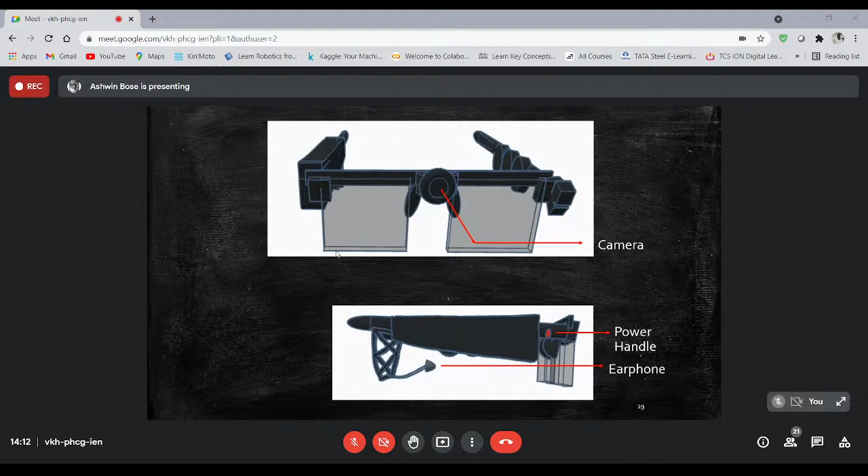So this is our next feature, that is obstacle sensing. We are using an ultrasonic sensor for this purpose. An ultrasonic sensor generates ultrasound and then receives it back after reflecting from an obstacle.

So we can label it as X. As the person proceeds, when the user faces some obstacle, the distance between the obstacle and the source changes. If that value goes out of the range of X minus 5 to X plus 5 centimeters, that means the person is passing through an uneven area, and that alerts the user.

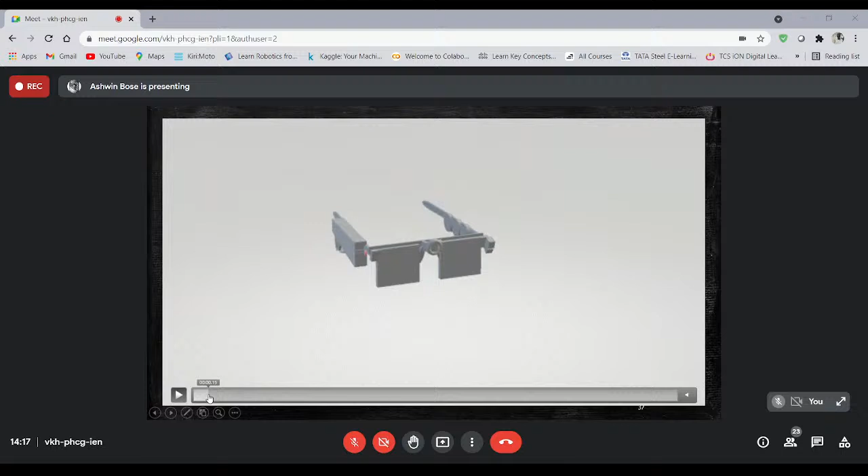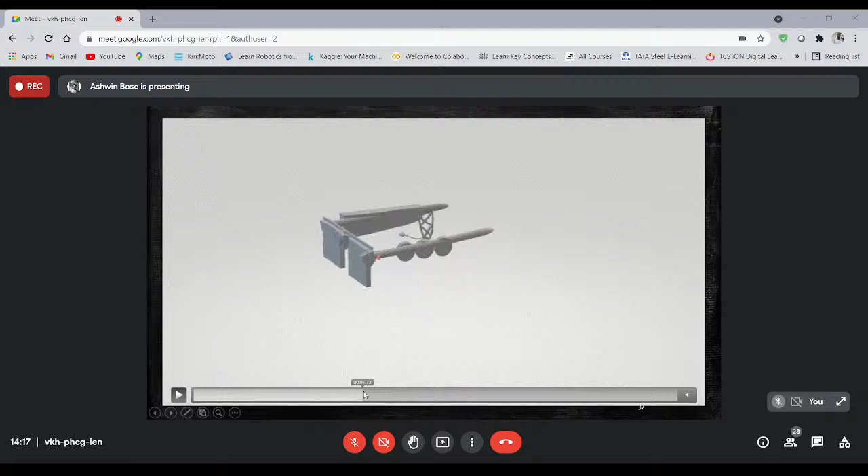So here you all could see the CAD of our model. You could see the cam placed in a toroid position which protects it, as I mentioned earlier. In the left leg you could see there are two pointing sensors. One is to sense the vertical obstacle, and the other is placed diagonally, at 45 degrees with the horizontal plane.

It helps the person pass through uneven areas, and you could also see a red button, that's the emergency photo button. Next to that, you could see three cells, that's a replaceable lithium-ion battery, so that we could replace it once the charge gets exhausted.

Shifting to the other side, we could see a casing where our main single chip Python-based computer is placed, and we could also see a gear via which an earphone module is placed. Finally we could see a red color button on this side, and that is the power button. So this is our CAD representation.

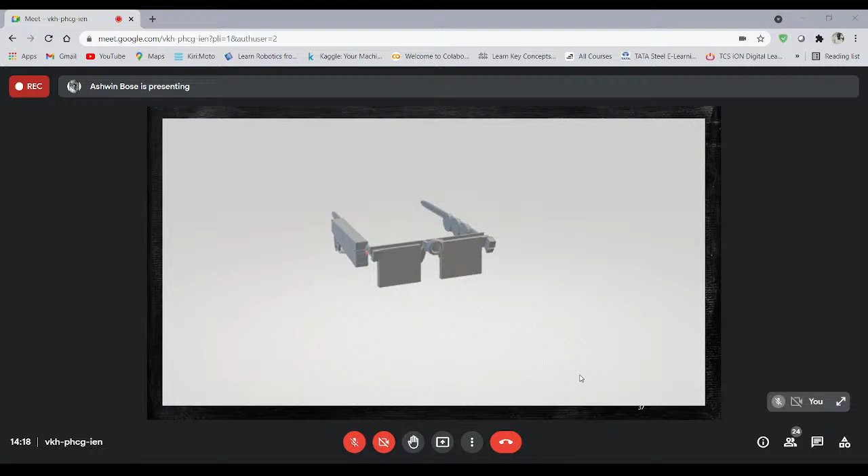So what makes us special? That's the main highlight: standalone device. We don't require any internet, and we only require the specs as a simple unit. We don't have any requirement of a mobile phone or internet. That means we can use our specs anywhere on this planet.

The battery charge will be measured every hour, and it will be informed to the user about the charge left every hour. Once the charge falls below 25%, the person will be alerted every 15 minutes about his battery life. Wi-Fi and Bluetooth are highly charge consuming, so we are avoiding them purposefully to increase battery life.

So why are we using this conventional shape? The dimensions are 15 centimeters by 15 centimeters by 5 centimeters. The weight is equally balanced in our specs. The battery case is exposed but covered, so we can replace the battery with a charged spare if it couldn't be charged on time. And we keep the front lenses unoccupied so as to prevent complete strain on the facial muscles.

So we have presented the problem, algorithm, program, CAD, and the concept of our project. Thank you.

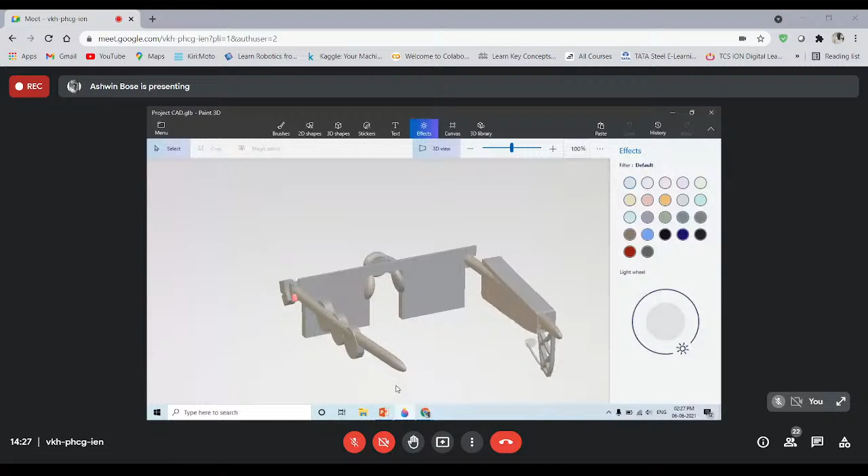Please advise the participants not to stop the presentation, because we may have to ask some queries based on it. So looking at this diagram, how will it be worn by the user? It has the same two legs like any other conventional specs, so it could be worn this way.

So we have placed a gear with earphone on the right side, and on the other side we have placed battery spaces which create a grip on the ears. We have also used this shape because it doesn't put pressure only on the front side - the pressure is equally distributed on all three sides.

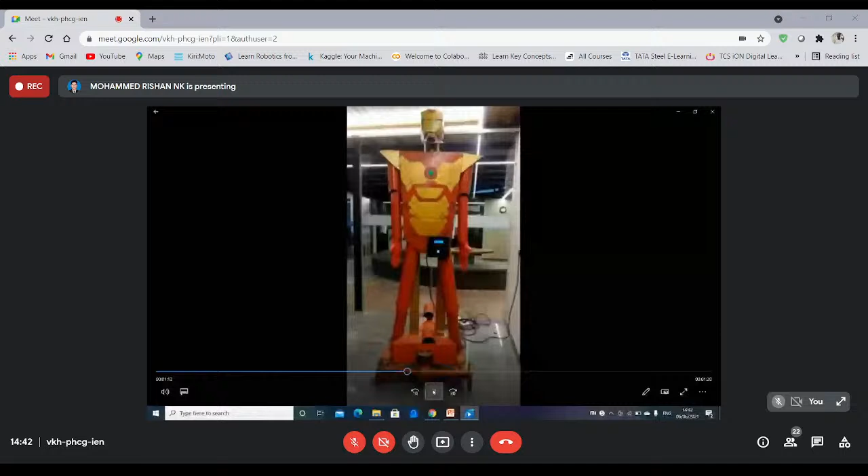Is it visible, sir? Yeah, it is visible. So this is backward and frontward movement. Now it is moving backward. This is a differential gear system.

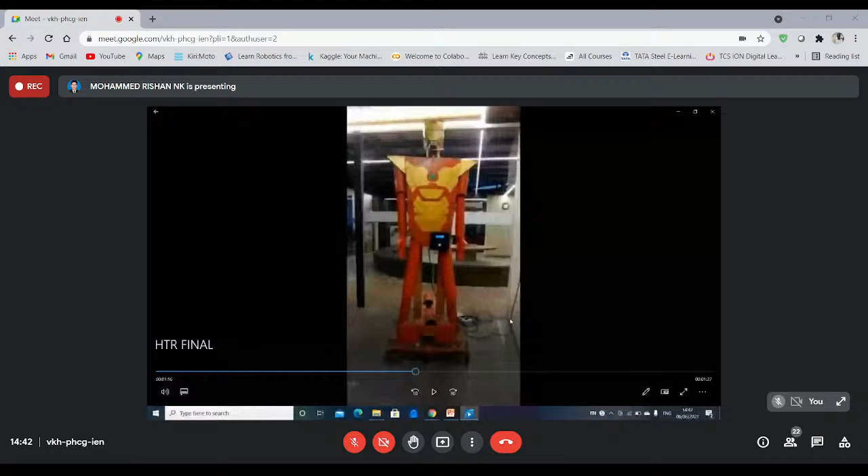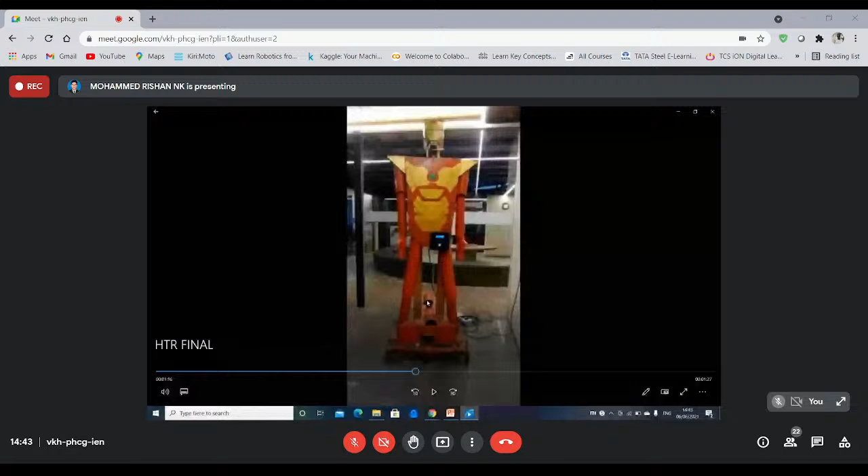I will show you the movement of its hand while drawing a picture. The hand can't draw, there's a CNC plotter, sir. So the CNC plotter is drawing, the hand cannot move. I will show you. CNC plotter is drawing. Okay, then we need only a CNC plotter for that purpose.

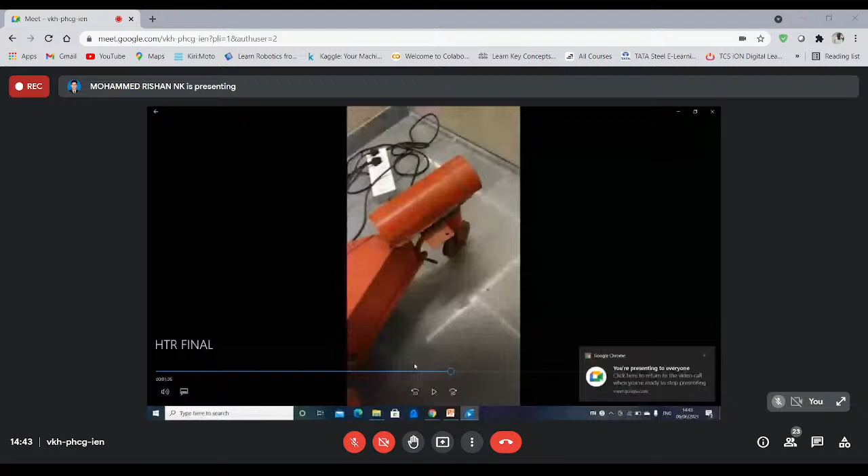So all these, what is the necessity of a robot-like structure? A robot, so that the students can interface and it will help them to give more interactions. And all these we can bind to a single product. Okay, you have some idea and you are taking some effort for that.

Yes, sir. But you cannot answer some of my questions. Why? You cannot give proper explanation because already the devices are very convenient, but this is a huge structure. That's why I have some queries. Okay, that's all from my side. Okay, okay. Thank you, sir. Thank you.

Okay, Mohammed Rishan. Yes, sir. Same question from my side also. What is the need of this big structure?

This is only a prototype, sir, developed for good appearance and good attraction. I have told you that we want to create the complete body into 3D printing technology. So the only additional facility which we provided is that plotting operation, and that can be done by a CNC plotter itself. Sure, then there is no need of going for a big structure and unnecessarily adding the cost and avoiding the degrees of freedom.

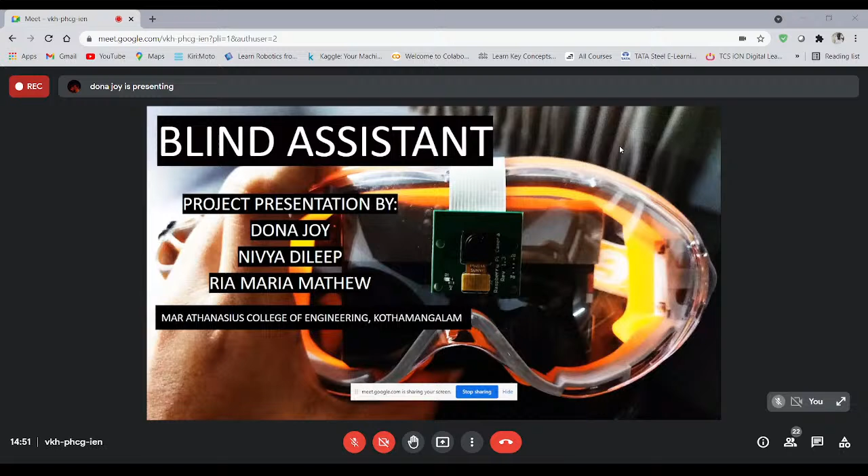I would also like to mention that this project is solely for blind students. We all know that blind students are shut out from the external world because of the constraint that they cannot see. So they are not able to contribute to society or get basic privileges like education.

Now I'll show you this is the braille system—everybody knows about the braille system. And these are pictures of the model that I've made. As you can see, this is the Pi camera, and we have the Raspberry Pi with the SD card inserted, and then we have the goggles.

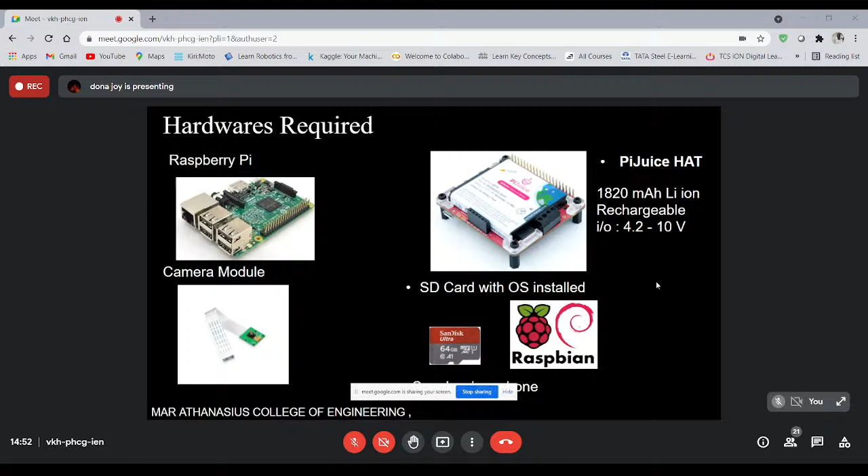Coming to the hardware required, we used a Raspberry Pi 3B Plus, and right now we used an external power supply connected to a power adapter and our normal power supply. But if we have the money to purchase a Pi Juice hat—a rechargeable battery for the Raspberry Pi that is compatible and rechargeable—then we don't have to use a power supply. We also have the camera module and an SD card with Raspbian installed. This is the Raspberry Pi, everybody knows about it, so I don't have to explain.

Coming to the software required, we used Raspbian for Raspberry Pi, Tesseract for character recognition and image processing, and OpenCV, a Python-compatible library used in Raspbian for many vision tasks. And then we have TTS, text to speech.

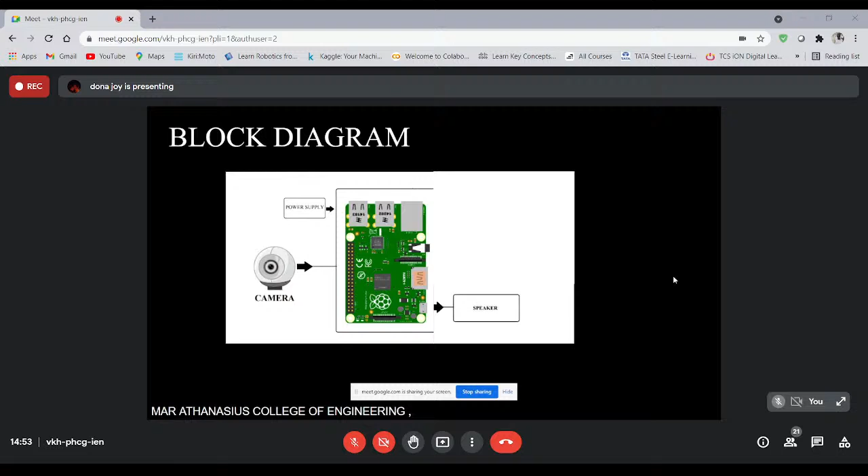The Raspberry Pi has inbuilt Wi-Fi and Bluetooth, so we just have to use a Bluetooth earphone.

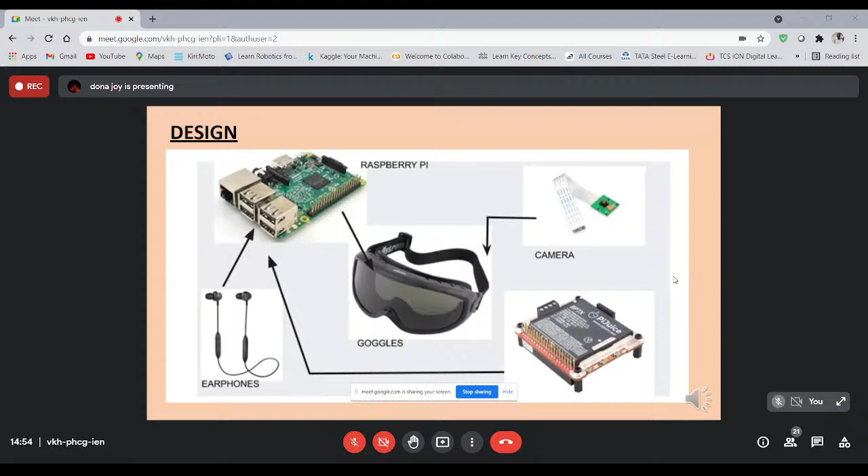This was our prototype; now we have an established product. In the prototype, we have the goggles where the Raspberry Pi is kept inside, along with the camera, earphones, and the PiJuice. Now this is the making of our project—we first booted the Raspberry Pi, and you can go through the slides.

Now coming to the first function of this project, text detection. As you can see, this is a pre-uploaded text image, and this is the detected text image. I'll show you the video that I have taken from the model.

This is the goggles with the Raspberry Pi in it and the camera here. And this is the speaker, and we have a display here. When I run this, three things are going to happen. One, the picture will be displayed. Second, the text of the image will be detected here. And third, the text will be read out using the speaker. So I'm going to run this.

Hello, audio is not there. Dona, can you increase the volume? Okay, audio is not there. Okay, I can explain. Hello, am I audible? Yes.

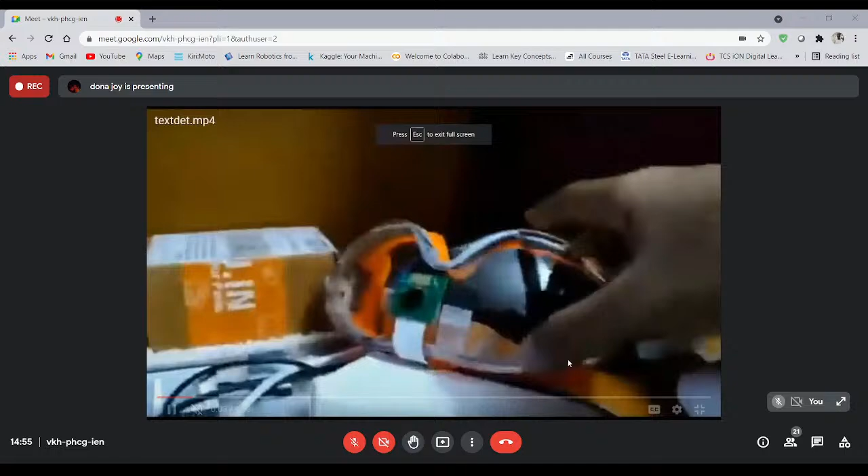So this was the initial setup of the text detection. As you can see, we have the Raspberry Pi model here, and then we have the connection, the speaker, and this is the program. First, I am showing a picture, and that picture will be text detected and converted to speech. So right now, this is me showing the text image, and this text image will be detected here, and it is read out from the speakers. As Meet is not allowing sound to come, you cannot hear it, but the speaker is actually reading out the text. Sorry for that.

Then we have the same thing. There's no use without the audio, that's it.

Okay, and now we have the face detection. This is a pre-loaded image, and as you can see, a bounding box will come. Sorry, yeah, the audio was supposed to be there. This was contouring and everything we use in face detection.

See, a bounding box is appearing on her face, and her name is being identified. We plan to use this in our model, and the blind person can identify people who they know, and they can get the data and name and everything, which will help them interact and communicate.

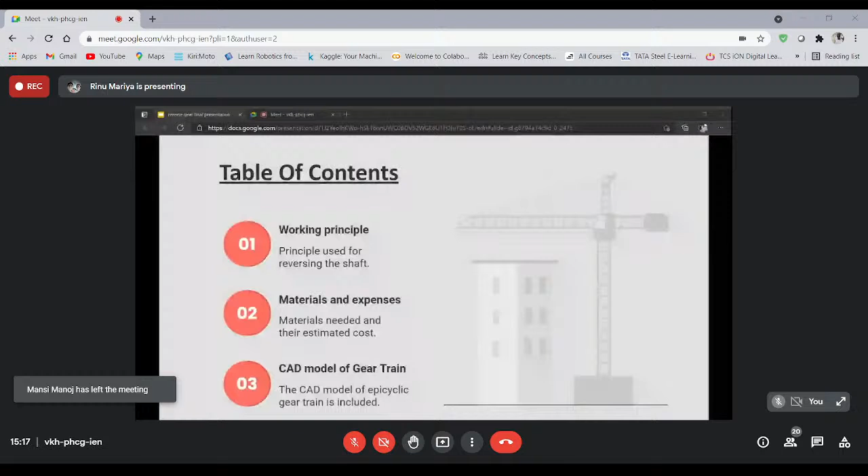Getting into the topic, firstly the working principle, the basic foundation of this project. I'll be explaining how this project works. So to obtain a reverse motion, which is our ultimate requirement, we need to reverse the direction of the shaft, which is why we are using an epicyclic gear train.

For the same, this epicyclic gear is attached with a lever. When the user pulls the lever, the gear is engaged and the direction is reversed. When the shaft is pushed, done by pushing the lever back to its initial position, the gear is disengaged, and thus a forward motion is reobtained.

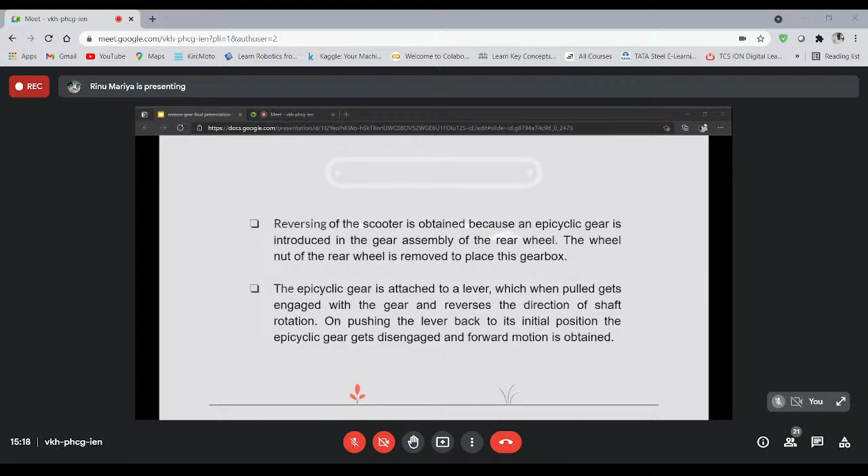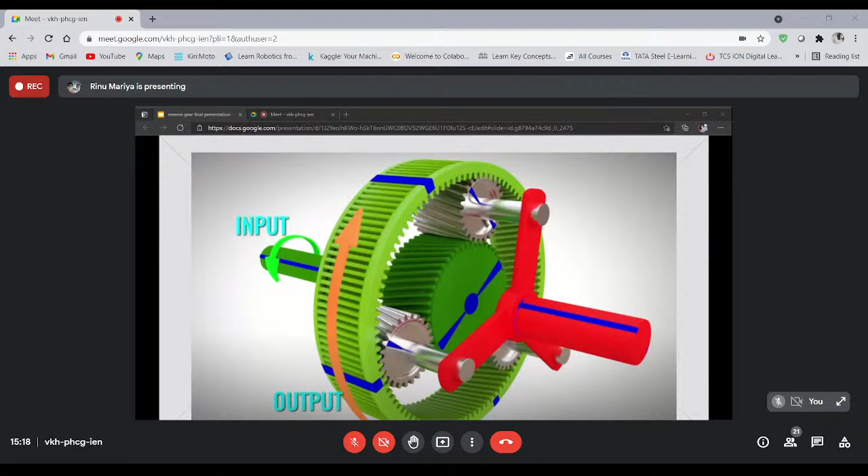So therefore, you can see that whenever the input motion is clockwise, the output motion becomes anti-clockwise, and vice versa, so that the input and output are in opposite directions. Therefore, our requirement, that is the reversing of direction, is obtained.

On the financial side, talking about expenses and cost cutting, to make the whole system more economical and cost effective, we do not change any inner mechanisms of the scooter. We simply add an additional attachment, which is the gear train, and there is no change in the engine, making the process and result simple yet effective.

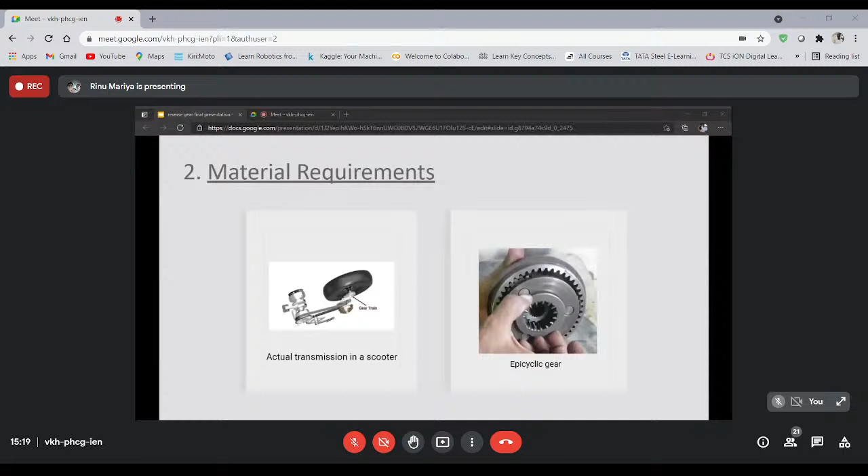As for the expenses of the overall project, it is estimated to be around 4,000. The exact prices are yet to be found out because of the present scenario not being on our side. Other requirements are the lever, used for disengaging and engaging the gear, and other workshop facilities like cutting, welding, and grinding. So all of these are the materials required and their respective expenses.

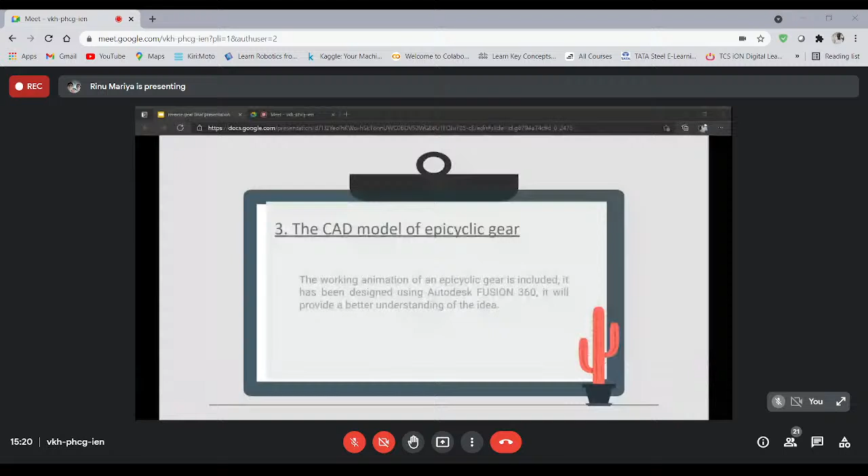Now, for better understanding for the viewers, we would also like to add a CAD model of the epicyclic gear train used in this project mainly, designed using the software called Fusion 360, as mentioned. So let's view the video.

Can everyone see this video? Yeah, it is visible. I think you have to click on the play button. Yeah, it's coming right up.

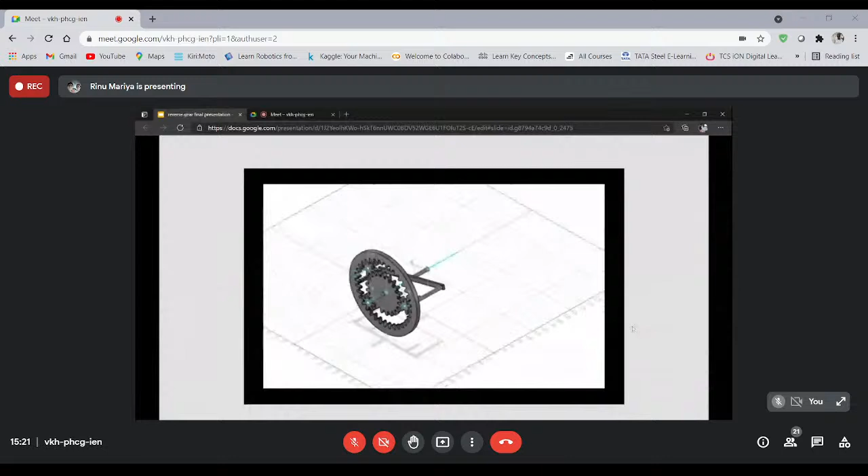As you can see, this is the CAD model. You have the sun gear as explained before, the 3 planetary gears, and the ring gear. You can see clearly that when the planetary gears are moving in the clockwise direction, the ring gear is also moving clockwise, whereas the sun gear alone is moving in the anti-clockwise direction.

So I hope that this gives a clear idea of the epicyclic gear train used in this project, which is the main additive. Thank you for your patient listening. Thank you.

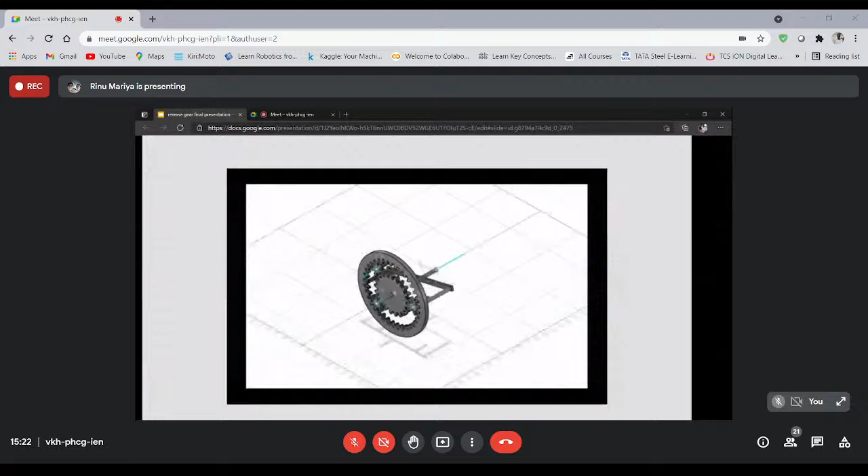Okay, Rinu and Sriram. Yes, sir. Okay, you are fixing this to a Honda Activa like scooter, right? Yes, sir, like to any handicapped scooty scooter type. But where will you fix this? Where is the exact position of this epicyclic gear? Sir, actually the scooty type consists of a CVT, continuously variable transmission, and a belt. So where will you fix this?

Sir, by removing the rear wheel nut, we are planning to fix the epicyclic gear there. So this additive has to be provided to reverse the direction of the shaft. When you pull the lever, this will engage, and when you push it back to the initial position, this will disengage. That is how our idea is.

So how will you transmit power from the engine to the back wheel? Sir, the power is already being transmitted, and there is no change in the power transmission. The only change that takes place is at the rear part of the wheel, just near the wheel nut, where when the lever is pulled it will engage and reverse the direction, and everything else is the same as now.

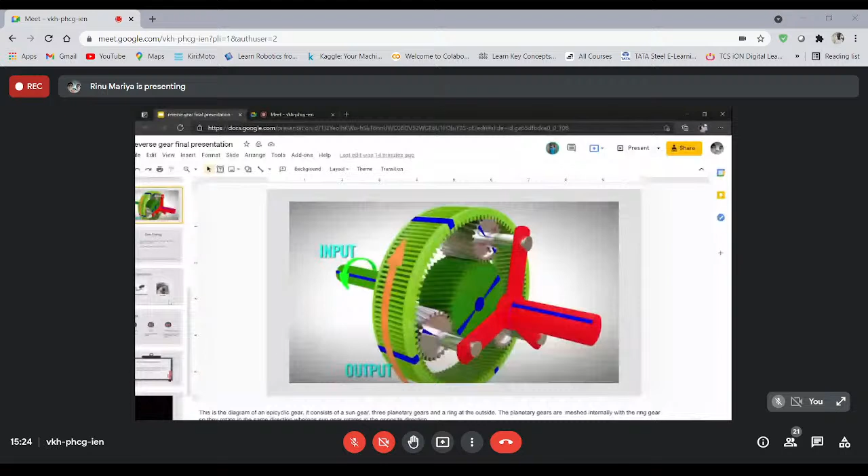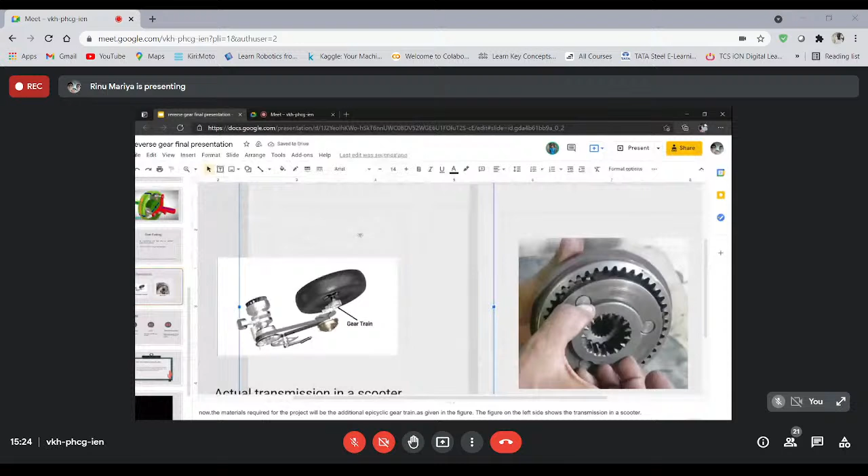Okay. It is nearer to the engine side, right? Yes, sir. We are fixing it, not at the wheel end. No, sir, we are fixing it at the wheel end, rear wheel end. But there is another... Yes, sir, the sketch is confusing. So this is the actual transmission. Actually, I am a mechanical engineer, that's why I am asking the details.

Yes, sir, we are providing that right side image. It shows the epicyclic gear that has to be included in the current one, the actual transmission of the scooter. You are providing it at which portion? Sir, we took this picture from a YouTube video which shows the transmission. So where is the epicyclic gear train?

That hasn't been included in the left side image. So that is the main problem of this presentation. You have not shown the exact position of the epicyclic gear train, because I know what is happening there, actually in a scooty. So I am confused about the position of the epicyclic gear train.

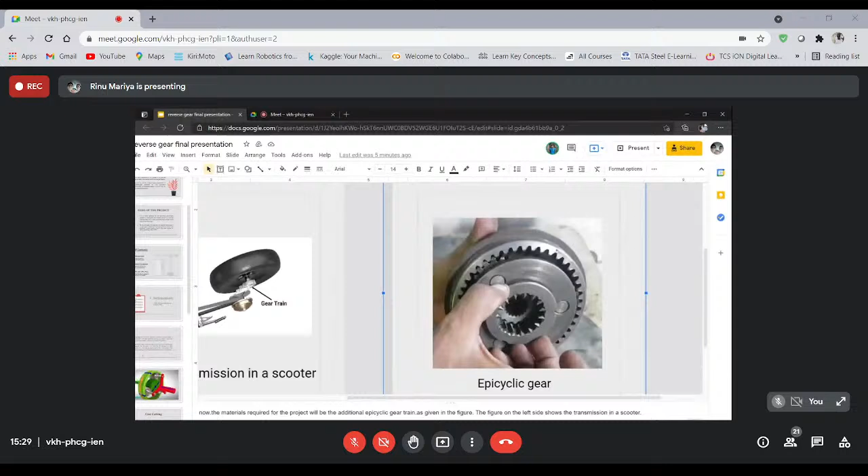Also in the simulation, you have shown the simulation for an epicyclic gear train. What are the dimensions you have used? Sir, the dimensions can be varied because according to the speed ratio, the gear ratio has to be changed. So it depends on the user, and I think for reverse gear we don't need the speed ratio to be very large because we are only using this epicyclic gear for obtaining reverse motion. So it depends on the speed ratio requirement of the user.

So you didn't design that one, you downloaded some epicyclic gear train? No sir, the epicyclic gear train shown in that video was designed by our team members. Then you will be having some dimensions for that one, at least. Yes sir, but we mainly focused on showing how to reverse the shaft motion.

Actually, you have to include the mounting details also, where it can be mounted. Then the size requirement will be a big problem. Size of this epicyclic gear will be a big problem during that time. But when it comes to handicapped scooters, there are 2 wheels in the rear part, so the size may not be a problem. But if it was the case of an actual scooter, the size could have been a problem. But since we have 2 rear wheels at the back, it has that much space.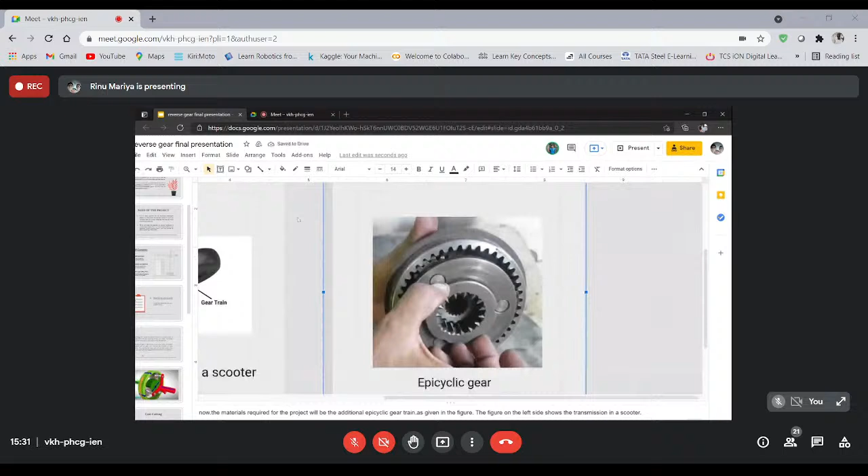But those 2 rear wheels move independently, it has no connection with the wheels of the actual scooter. Okay, so it's an extra fitting. But there are some scooters in which you can only see 2 wheels in the back side, right? So then we need a differential. Yeah.

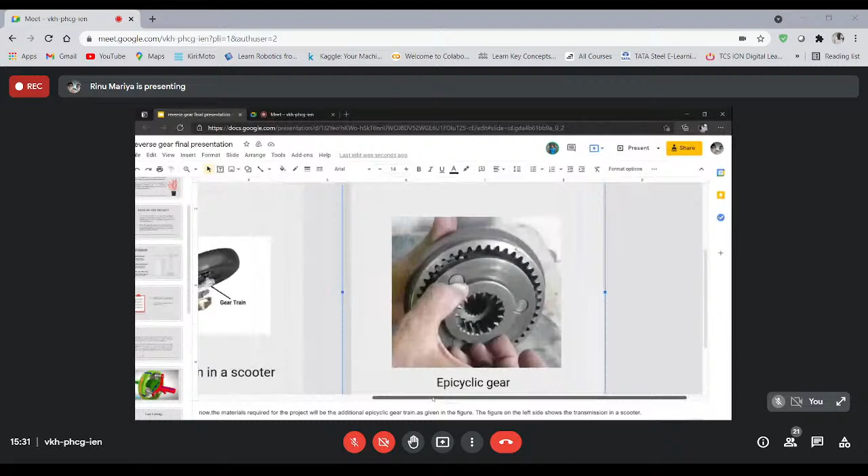Okay sir, Sriram, okay sir. Anyway, the 2 teachers are experts, they have asked the queries.

I think people use the term, but I am a little bit confused why it is called a handicapped scooter. They are being used by handicapped people, right? But it needs to have support. But basically this implies the scooter itself is handicapped. The term, usually people may be using it, I don't know, but when you look at your heading or topic title, handicapped scooter means the scooter is somehow handicapped.

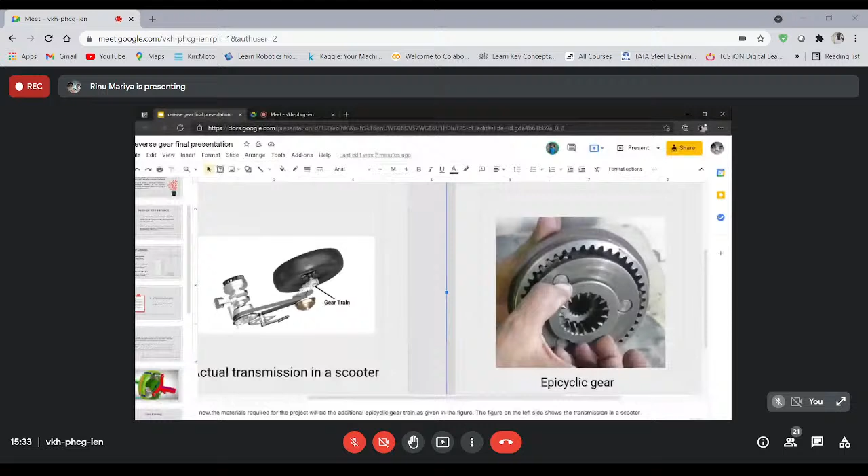So sir, usage may be there, right? I don't know, I think if you Google it you can see some pictures related to that, but I don't know whether it is correct or not. While we Google, we get a lot of information, but when we give a paper title or something, we have to be a little careful. So I don't know whether this usage is right, please check. I think 'scooter for the handicapped' or maybe 'scooter for the differently abled' would be better. Even 'handicapped' is not correct nowadays because of sensitive issues, sensitivity to differently abled people - we have to consider the use of words. Anyway, I don't have any more comments. Thank you, thank you sir.

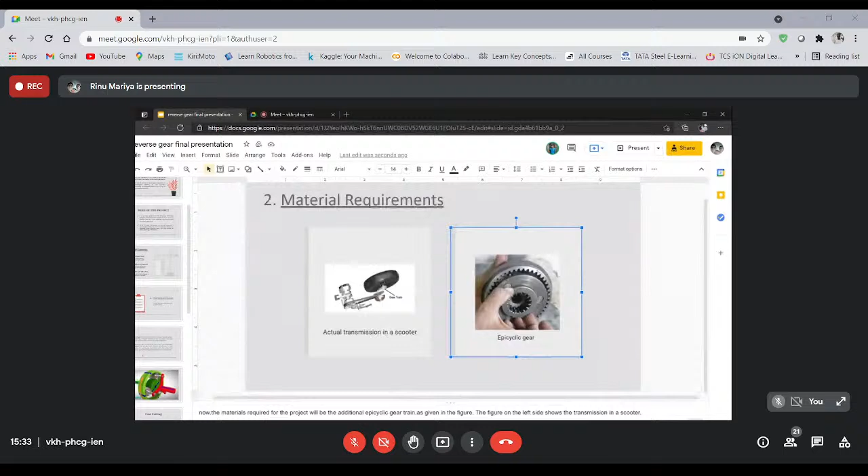So the name of our project is Mano Amica, which is Italian for helping hand. The problem we are addressing through this project is that there are currently about 3 million arm amputees in the world, out of which 2.4 million are from developing countries like India, majorly from India. Out of this, only 5% of the amputees have any kind of access to prosthetics, and out of this 5%, majority is from developed countries. And even in this 5% who have access to prosthetics, they use cosmetic prosthetics.

Excuse me, are you showing a presentation? You couldn't see? Oh sorry, I'm not able to see. Can others see or not? No, it is not present. Sir, can you see now? Yeah, it's coming.

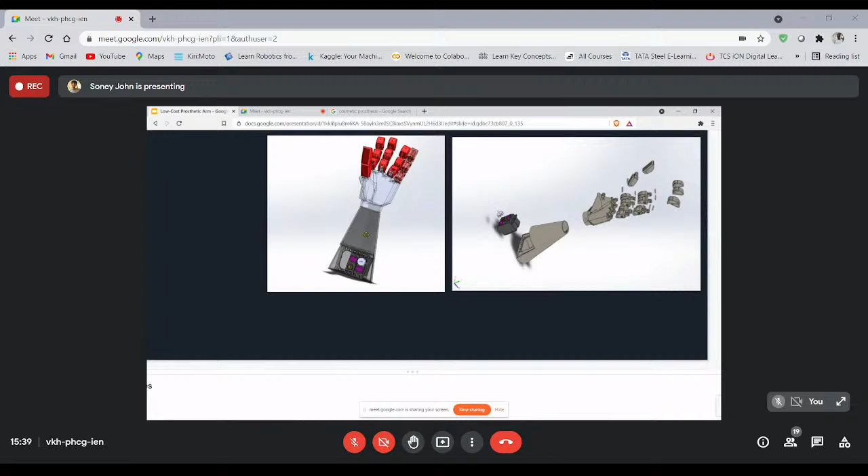On the right, you can see the exploded view of the prosthetic arm. What we have done here is create an artificial tendon network, inspired by the tendon network seen in our hands. As you can see in the anterior view, there are tendons that cause flexion, which causes our wrist to close, and this causes our fist to close and open. So we are applying the same model to our prosthetic arm.

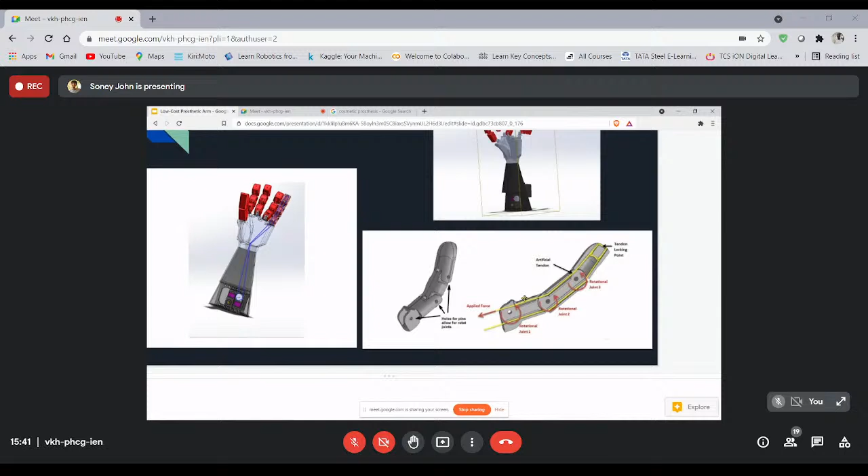We have created holes in the model where we can insert artificial tendons, connected to a servo motor and a spindle. When the motor spins clockwise, an applied force closes the finger on itself. When the motor rotates counterclockwise, the wrist opens, the palm opens. That is the mechanism we are using for the project.

This is a large project, and we have just begun phase 1. Phase 1 is to model our arm, prepare a CAD model of the arm, and prepare a flexion and relaxation mechanism to open and close the fist, just opening and closing the wrist of the arm.

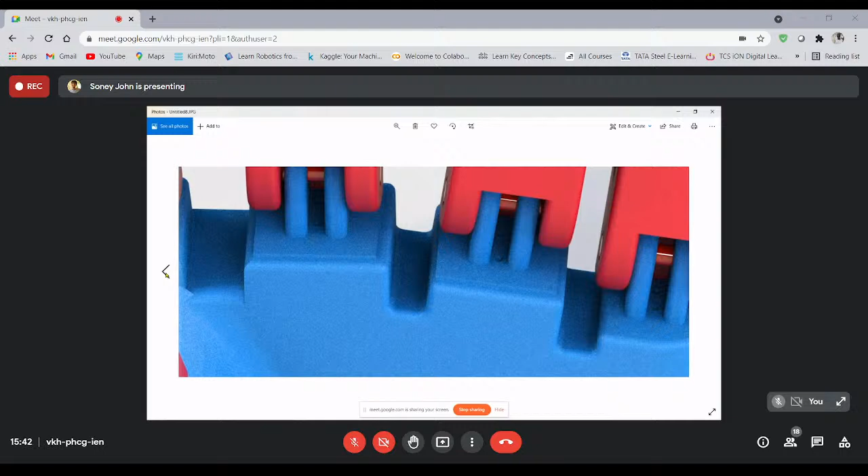This was our first model of the prosthetic arm. It used a lot of material, so we created another model that uses less material and is much more functional. You can see the CAD model on the screen.

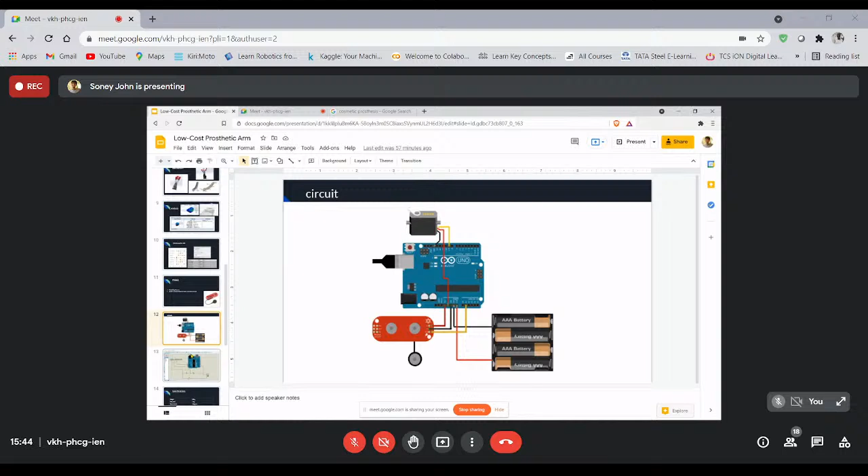This EMG circuit will pick up electric signals from our nerves and send them to the Arduino board. If the value crosses the threshold limit, the servo will begin to turn. In the real project we will use multiple servos and multiple EMG sensors. This is just a basic circuit, and here is the schematic for the same.

Here we have used a voltage divider circuit to get the required 5 volts for the EMG sensor from the 7.4 volt battery we are using.

The battery we are using is a 1000 mAh battery, and if we are running one servo for just the opening and closing, all we need is one servo motor. With that, we can get 5.4 hours of max continuous running of this prosthetic arm. But no one is going to use this prosthetic arm continuously for 5.4 hours of opening and closing, so on average, we can get up to 12 or maybe more days of battery life in this product.

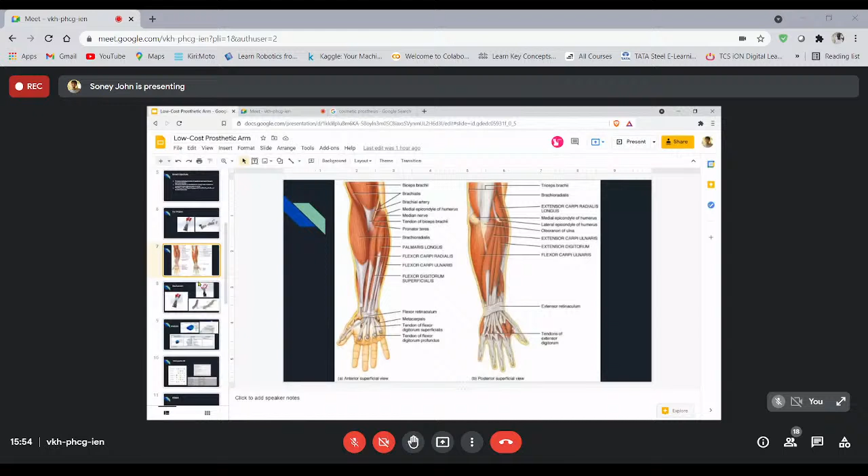With these electrodes in this EMG sensor, shown here and here, we can detect the electrical signals even at the surface of the arm. That signal is received and processed in this EMG sensor. The sensor processes it and gives out an analog voltage from 0 to 5 volts, which is the working voltage of the EMG sensor.

According to the magnitude of the signal that comes in, we can put out a proportional control for this motor, so that it can provide the needed torque. How will it differentiate whether the signal will be given to different portions?

Sir, for this prosthetic arm, for transradial amputation - that is, below elbow amputation - we have to flex our muscles hard to get a signal from the amputated portion. When this muscle is flexed, there will always be noise, so we apply a filter to filter out the noise, and we rectify it, and we try to find the right frequency.

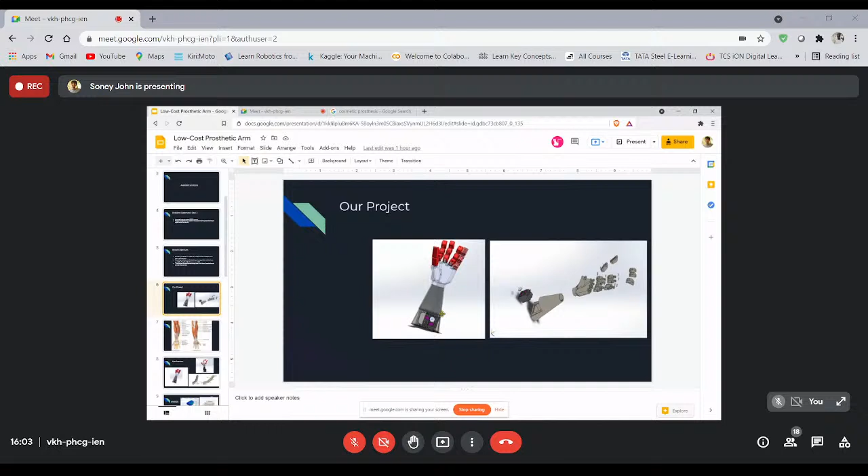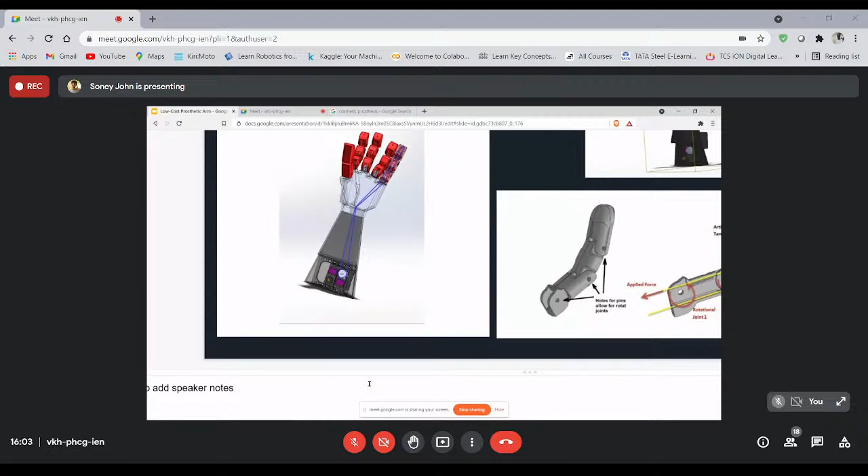We have to first provide a tendon network, and create that just right without any looseness in the string, and it can rotate up to 0 to 180 degrees. So how will you order a servo motor for your requirement? How will you decide that this particular servo motor is sufficient?

For our first phase, we selected a simple servo motor from the online marketplace, and that was enough for this model. But we haven't thought about whether to customize that or not.

Even under the lockdown, these things can be done - computations and such don't require you to come together physically. So you should move quickly during this lockdown period, so that by the time it is lifted, you will be ready. Yes sir, thank you, thank you sir.